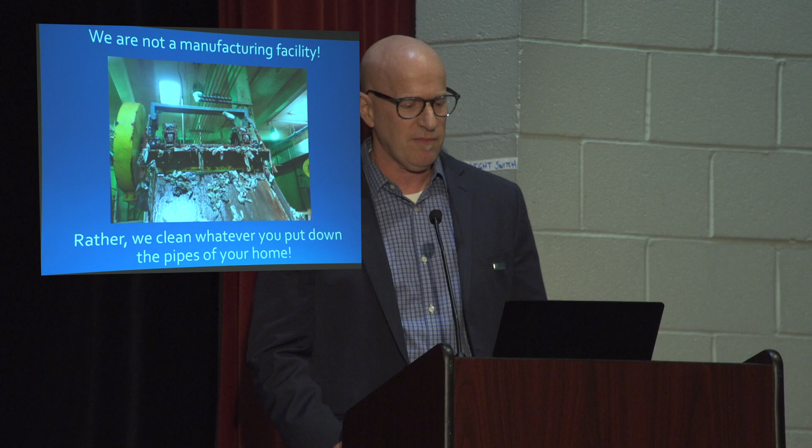Needless to say, it's challenging work. Our operations group is led by a team of dedicated licensed operators, making sure our effluent meets permitted standards. Customer service diligently processes customer billing, fielding questions and reviewing bills with our customers. The industrial pre-treatment team is responsible for verifying that industrial users adhere to discharge standards and overseeing the proper maintenance of grease traps in restaurants.

Our collection system staff maintains the 500 miles of collection system, cleaning, videoing, and responding to emergencies. Our engineering department manages consultants and contractors involved in our capital projects, manages and maintains our GIS system, and reviews all proposed developments in the 4 communities, ensuring they comply with our standards. We have 8 on-call contractors ready at a moment's notice to be dispatched on any emergency that occurs.

So let's step back. What is a combined sewer? If the group was larger, I'd ask how many of you know what a combined sewer is. Well, I'm going to explain that to you, so we can move on.

Under normal dry flow, here's a typical sewer: you get the discharge from your home coming from your washing machine, from the showers you take, any use of water in your home going into your sewer system, and it's coming into our system, following the path ultimately back to the treatment plant.

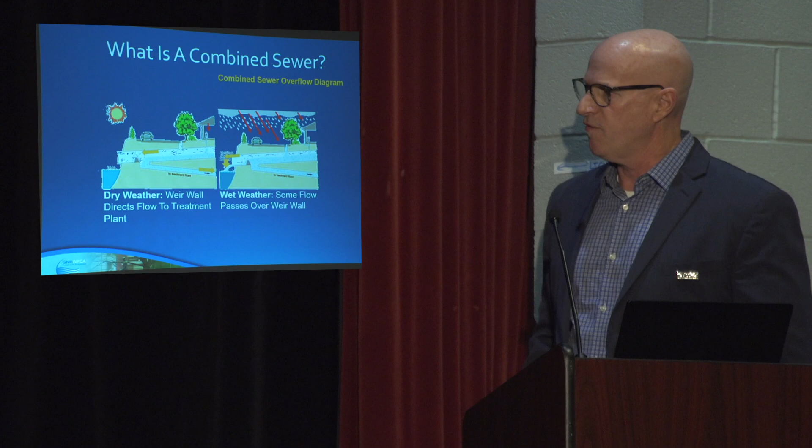Then it rains. And when it rains in a combined sewer system, the pipes — not only from your home, but from roof leaders, buildings, parking lots, and roads — come into the system and ultimately fill the pipe up. When it fills the pipe up, we have relief areas in the pipe called combined sewer overflows, located at what's basically our weir, which I'll show you pictures of later. The flow, when it reaches the top of that weir, overflows and goes into the water course.

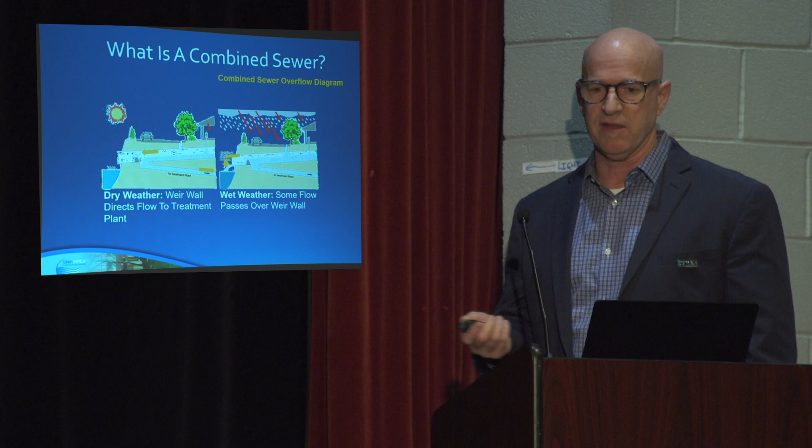This is important because if you didn't have these relief points, if you closed this sewer off, the pipe would fill completely and ultimately back up to your home and onto the road. So there was a real purpose for having these overflows — it basically kept the sewage in the pipes most of the time, and when it rained, it provided relief.

So why do we have these? It's an evolution process — we inherited a system that's been here for a long, long time. There's a map of New Haven from 1872; you can see it's sparsely developed. I think the toilet was invented just about 15 years before that — I Googled that, so if it's not right, blame Google. But at that time, toilets really didn't become widely used until around 1900.

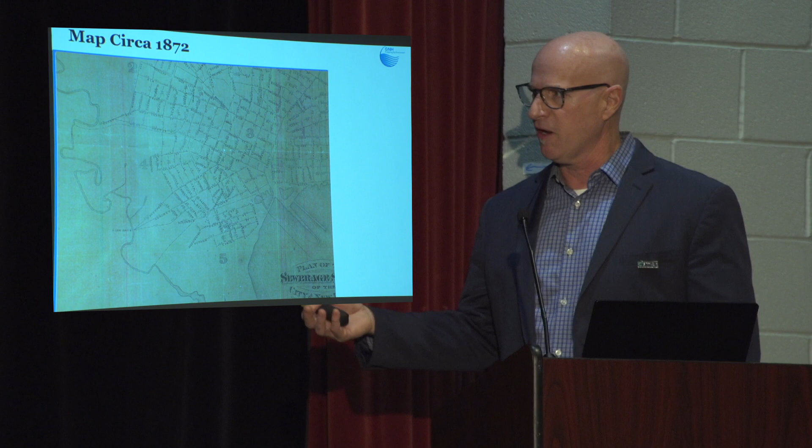So most of the pipes on this map were probably collecting waste from the roads and maybe from some homes with water use, but with horses around you'd have a large mess — so rain fell on the ground and roads, went into the catch basin, and out into the pipes we have here. Back then there were really 4 or 5 major pipes, fairly large, that took flow out to the West River and the harbor.

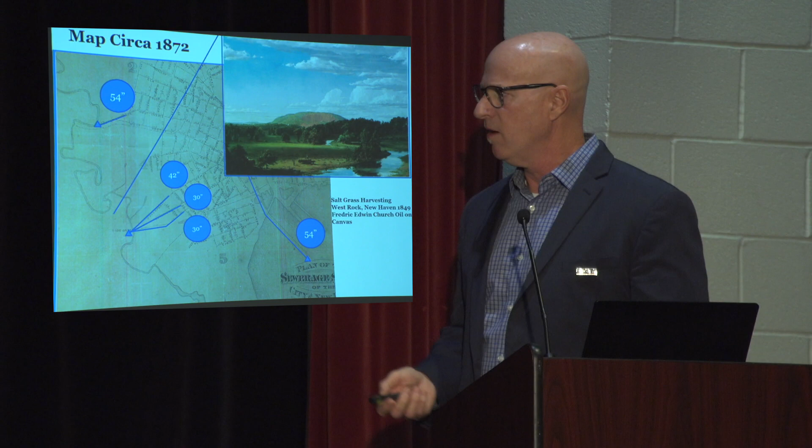This is an interesting photo — note that there's salt grass being harvested in the West River here. This painting is from 1849, done by Frederic Edwin Church — he's famous in Connecticut, I guess — oil on canvas. You can actually see this original painting at the Museum of American Art in New Britain; I've actually seen it, gone with my mom a couple of times. It's a beautiful painting, so I encourage you to go check it out. Note that the salt grass is being harvested there.

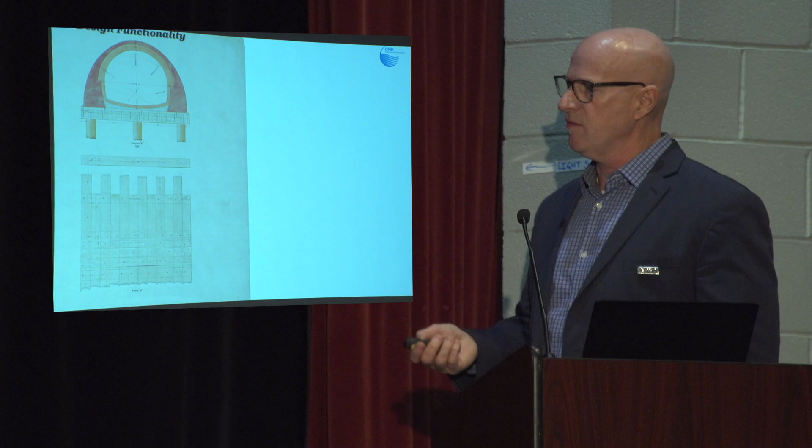This is actually an engineered drawing used for construction of one of our sewers in New Haven. As you can see, it was very similar to the one constructed in that previous photo. And here's one of those weirs that I was talking about.

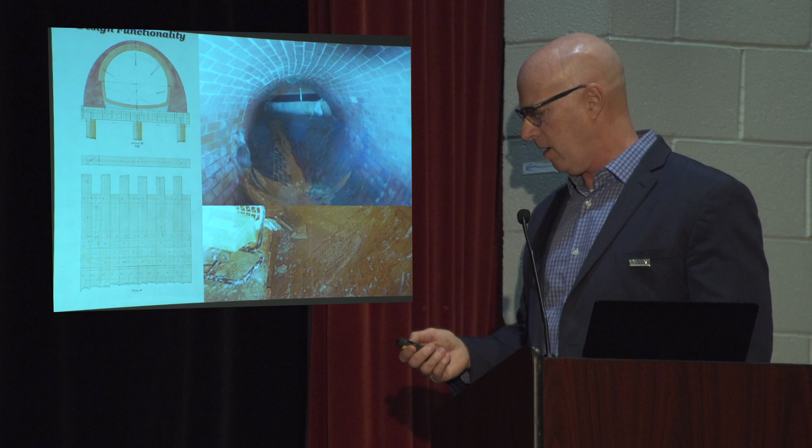This is an overflow weir, where the CSO—the combined sewer overflow—occurs. Just on the other side of that is the sewage flowing by on a normal day, getting transported to the pump station or treatment plant. During heavy rains, water is allowed to come over that weir and flow toward you in this photo, out to the outfall, which is behind you.

In this particular case, we were actually making a repair to that. It's tough to see in this photo, but this is where the sewage is—flowing left to right, going down the pipe in the Boulevard Interceptor. I mentioned that the Boulevard Interceptor was constructed above grade. It has since been covered, obviously, by Ella Grasso Boulevard, so to this day that combined sewer still exists under the road there.

So here's that same map. In this particular case, I positioned some of the new infrastructure that was being built over time. Between 1937 and 1939, the first treatment plant was built, down there on Boulevard where the Sound School is. About the same time, the East Street pump station was built.

Actually, I call it a pump station because it is now—the East Street plant was built at that time. You can see where that star is located. The Union Street pump station didn't get constructed until 1983, which is somewhat amazing, because there was still a small portion of the city of New Haven's combined sewer that was allowed to go directly out untreated. The treatment plant on East Shore was built in 1946, upgraded in '75, and expanded in '85.

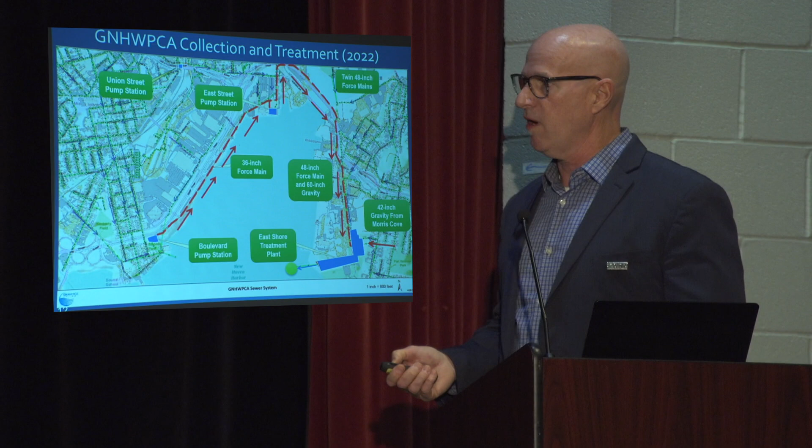Union Pump Station is also shown here. That just gets you over the railroad, and ultimately that flow is double pumped, ending up going into East Street Pump Station.

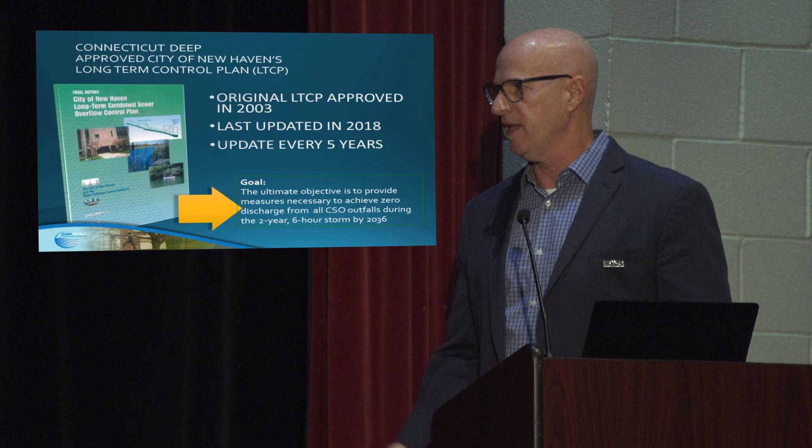Let's go back. The original long-term control plan was approved in 2003, last updated in 2018, and updated every 5 years. The ultimate goal is to remove CSOs in the 2-year, 6-hour design storm—an agreed-upon design storm negotiated early on in the original plan—with a goal of 0 CSOs during that design storm by 2036.

Where are these CSOs right now? There are 11 CSO outfalls: 3 in the harbor, 4 in West River, 2 in Mill River, and 2 in Quinnipiac River.

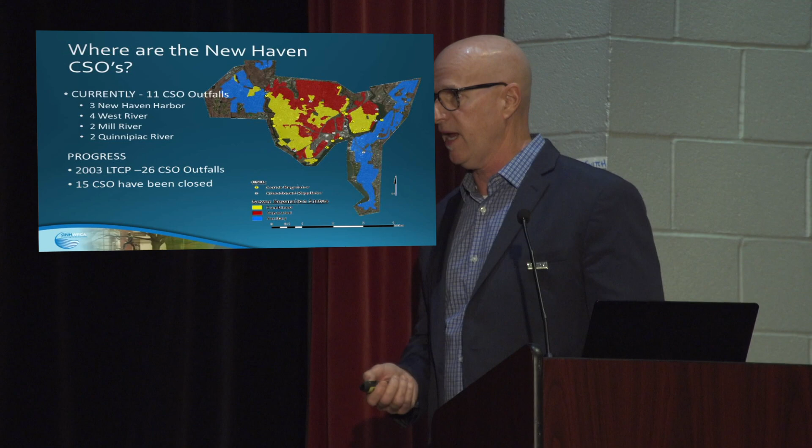What kind of progress has been made? Here's a simple way to measure it. Back in 2003, in that long-term control plan, there were 26 CSO outfalls. We've worked over time and reduced those by 15, bringing it down to 11. Great progress has been made on that.

What's the strategy? It really hasn't changed much since the 2011 update: maximize conveyance and storage in the collection system, maximize flow to the treatment plant, reduce CSOs by modifying existing regulators and structures, and increase capacity at the treatment plant. There are two tools in our tool belt that probably weren't in the original plan, or weren't stated as strongly—one is green infrastructure, and the other is resiliency.

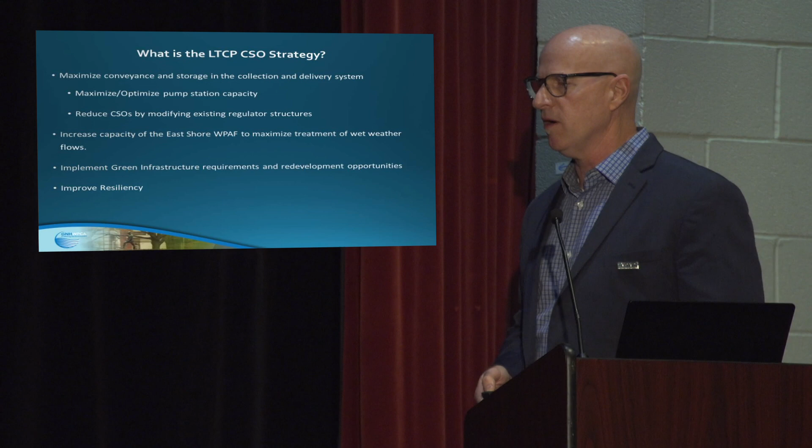Everyone remembers Storm Sandy. They probably know exactly what they were doing when they saw reports of New York City underwater, and if you're along the coast here, you were very aware of it. That changed the game in the Northeast on how we have to design for these storms. A lot of federal money became available because of these storms, and we took advantage of that.

In this graphic, we have our Fort Hale pump station in New Haven, one of 4 stations, along with East Haven, that we elevated. These stations are in flood areas, and in this case all the equipment was in the lower level—if you got a storm surge, that station would go down and become unusable. Now the generator is located well above any flooding, and all the equipment below is pumping equipment designed to be in the water, so this station will continue to operate during a flooding situation.

This one, along with the 4 in East Haven, were each $1 million projects, funded through a 75% grant we got through the FEMA program to make them more resilient.

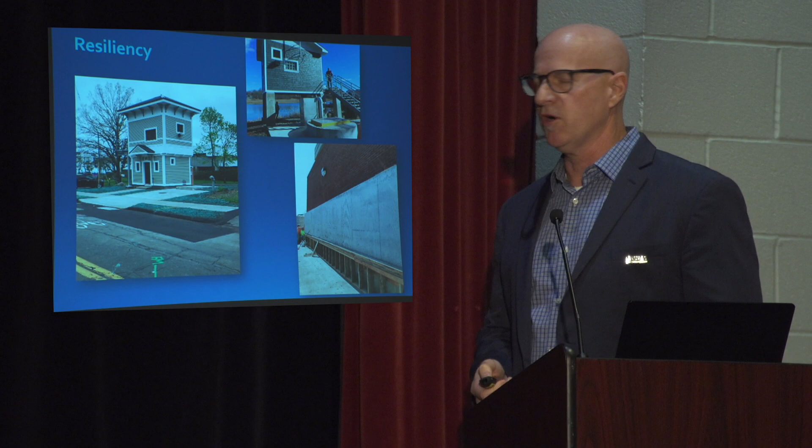This doesn't look very fancy, but this is our large Boulevard pump station, the one handling 30 million gallons a day, and this is its flood proofing. When we get significant storm surge, this station has barriers that get installed in the doorways, and the outside of the structure was reinforced to withstand flooding, so this station will stay functioning during any flooding events. That's some of what we're doing with resiliency.

Green infrastructure: we like to be a good neighbor and a good example. This is our own parking lot at 260 East Street, a sample project. Even though we're not in a combined sewer area there, we do discharge to the storm sewer, so we developed a green infrastructure parking lot.

The flow goes into bioswales, and the plants there, just planted, have grown significantly. They uptake most of the water in normal rainstorms, and during heavier rainstorms it's allowed to overflow into the storm sewer located in the street.

We're very proud of this one—it's the first bioswale ever constructed in the city of New Haven, done through the teamwork of the city of New Haven, the Greater New Haven WPCA, and the DEP. This is also, to my knowledge, the first bioswale incorporated and made eligible in the Clean Water Fund.

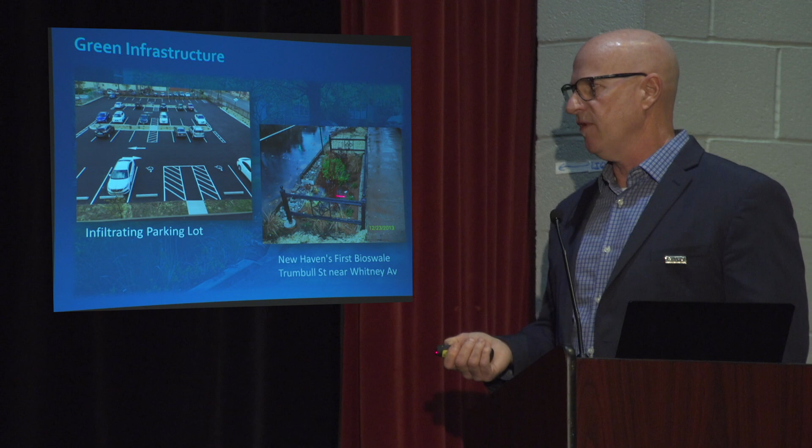We built over 90 of them in the West River watershed basin. They take up flow in common rainstorms, and for the heavier ones, they do a really nice job taking that first flush of rain out of the system. So it benefits not only the storm systems in New Haven where they're installed in a storm system area, but they also benefit us in the combined sewer area.

So just kind of quickly reviewing the 2018 update, the long-term control plan update, that was the last one. That one we focused more on the collection system. We focused on short-term improvements to reduce CSOs. These were raising weirs, anything that we could do that kept flow in the existing system.

And we were able to do that because by that time, we had many years of CSO monitoring. And with that knowledge, we were able to close many CSOs, and we were able to raise a lot of those weirs at the CSO outfalls.

We also embarked on an aggressive cleaning campaign where we cleaned over 20 miles of large diameter sewers. We took out 3,000 cubic yards of debris. That debris, now that it's removed, that's additional capacity that those pipes have to handle flow.

We made some improvements to our pump stations to increase flow, maximize flow to the treatment plant. And one of the unique things we did in New Haven back in 2008, it's worked out very well, is we required developers to do exactly what we're required to do.

DEP and the consent order requires us to handle that 2-year, 6-hour design storm. So when a developer comes in and they want to connect back into the combined sewer with their storm drainage, they can do so, but they have to retain that 2-year, 6-hour storm on site.

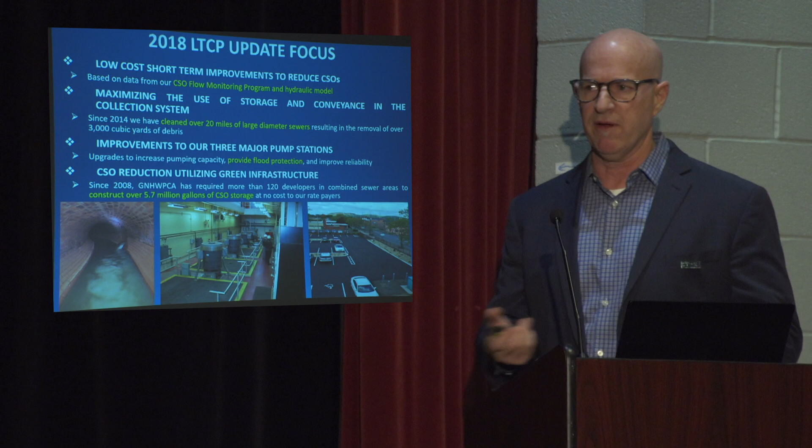They could be bioswales, but most of the time they're almost like septic systems, below grade systems that capture the water, allow it to fill up. New Haven's a great community for infiltrating water. It's very coarse sands, so it really is a perfect marriage in New Haven to be able to put in these infiltrators.

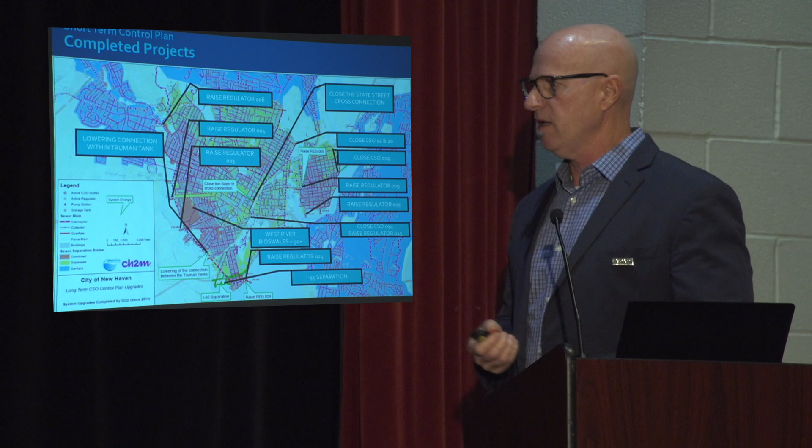So, like I said, these short-term projects that we started in 2018, we identified all of them. I'm not going to list them all, but you can see we closed many CSOs, we raised a lot of regulators. Every time we do this work, we go in and do this stuff. We take photos, we document, we send it up to DEP, and we make everyone aware that we're making progress on our program.

So as we made improvements, we had to run the model again to see what the results were. But we couldn't just plug in any rainstorm, or any given year, because every year is different. So we have our consultants and DEP and the authority all agree on what a typical year would be. They look at all the years - I think we went back into the 40s and 50s, all the way up until present - and determined which year had the most typical rainfall. As it turns out, it's the 1967 year.

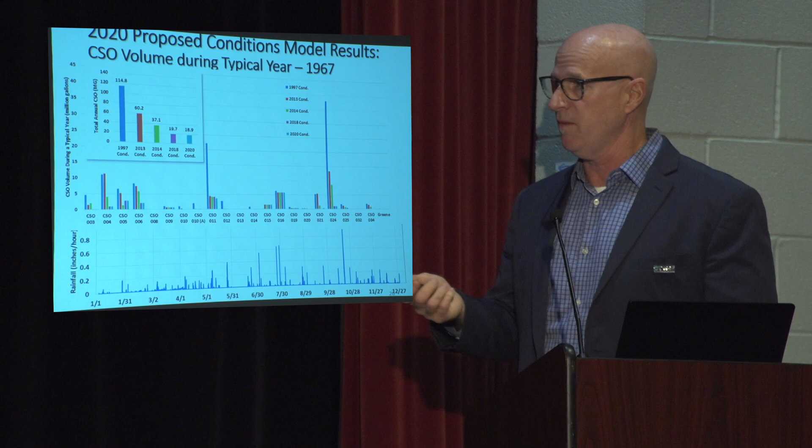We know this is true because we actually look at the flow. We have flow monitoring information that we look at all the time, and our typical rainstorms, as long as we remove the outliers - the years we have very little rain and the ones with a significant amount of rain - we're coming in around 18 to 20 million gallons a year. So we know this model is fairly accurate.

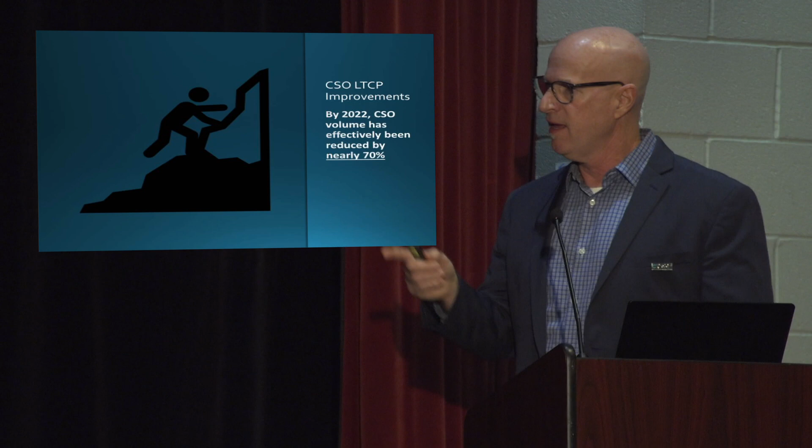Like I said before, right now we've reduced CSOs by nearly 70%. That's pretty significant. There's a mountain climber here, Nick Stevens, who's going to speak later. He likes this graphic, but it really is true - if you're climbing a mountain, the higher you get, the more difficult it gets. It's similar to our program. The closer we get to removing CSOs, the more difficult it gets, the more expensive it gets.

So now I'm going to turn it over to Mario Riccozzi, our manager of design, and he's going to go through the near-term projects that we're working on and take it from there. Is there any questions on the program as it existed and how we've gotten to this point before I turn it over to Mario? We can have separate questions. If there's not, I'll hand it over to him.

Thank you very much, Tom. Appreciate it.

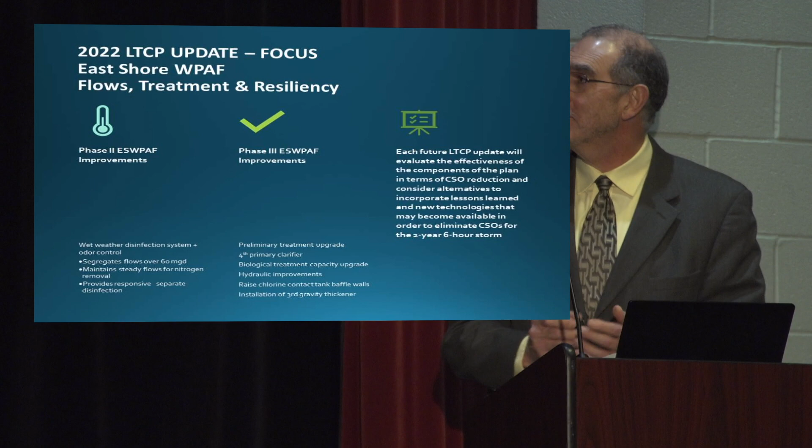So where are we and where are we going and why are we doing this? The 2022 update - the major strategy is to bring and maximize flow to the treatment plant. That is from back in 2011, and we did the phase 1 work at the treatment plant where we really installed the backbone necessary to make these improvements in the future.

We upgraded the electrical system, we upgraded the odor control system, and we increased the number of vessels to manage the solids, because the more flow you bring in, the more solids you end up with. So we put those all in place, we monitor that, and then we say, what is the next step? What are the other projects that we're going to be doing?

As part of a long-term control plan update, you really want to look at the sequencing. Just like your own home, you don't want to do all these projects all at once, because you won't be able to live there while you're doing all the projects, or it'll be very uncomfortable. So we try to sequence them to build and operate systems that have the flow coming to them that'll make them useful. We don't want to build a building and put in pumps that aren't going to operate for 10 years or 5 years. Makes no sense - they'll be old and obsolete before we can get to use them.

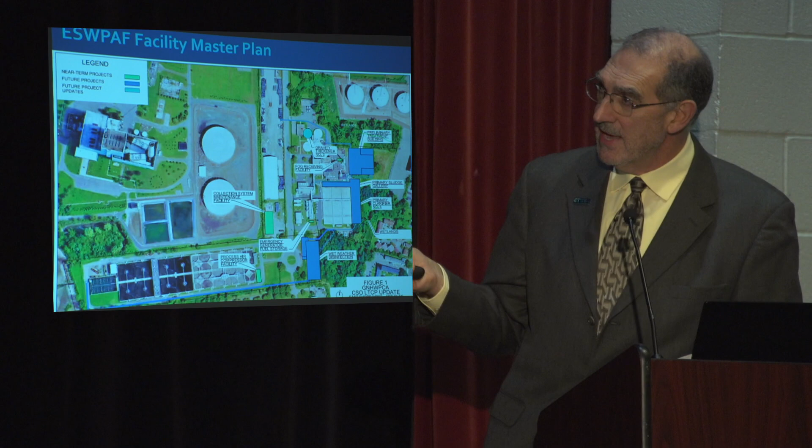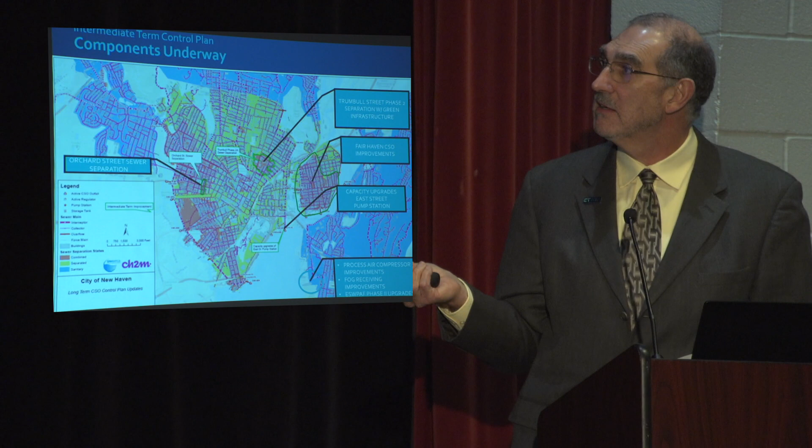Projects that we have underway right now: there's a Trumbull Street Phase 2 sewer separation project in the downtown, which I'll cover. Orchard Street sewer separation project, also near the St. Raphael campus of Yale New Haven Hospital. There is a project coming up for the Fair Haven CSO improvements, the next phase of that. Our East Street pump station, which I'll cover, and I already discussed the process air compressor, but I'll give you a little more information on that.

But you can see we're working all around the city in a number of locations. Sewer separation was really proposed by the city back in the 1980s. They did quite a bit of it. They had a plan put together as to where we should size, what pipes should go in what locations, what sizes, so that we can get the stormwater out to the harbor and avoid it mixing within the combined sewers.

These two projects, the Yale campus Trumbull Street project, is immediately north of Trumbull Street. I believe it was around 2012 to 2015, we closed part of Trumbull Street, the exit and entrance into Yale's campus, in order to install a separation project. That was to connect the Farmington Canal Greenway storm drain that had been installed over time into the State Street storm drain that had also been installed as part of redevelopment projects. So that little piece, even though there was work done, still was a combined area. Now we've separated that, which allowed us to close one of the CSOs, combined sewer overflows, so no longer does the water from that area overflow the sewage from that area.

The Yale campus project is a little unique. It's our phase 2. Now that we understand better how bioswales work in the city of New Haven and how the soils react, and working with DEP and the city, we have orange lines. This is Whitney Avenue, this is the Peabody Museum if you're familiar with that, Sachem Street, Pearl Street. This is a connection again into that State Street main that was installed many years ago in the 1980s when State Street was redeveloped. So we're completing this connection through Bradley Street and Whitney Avenue.

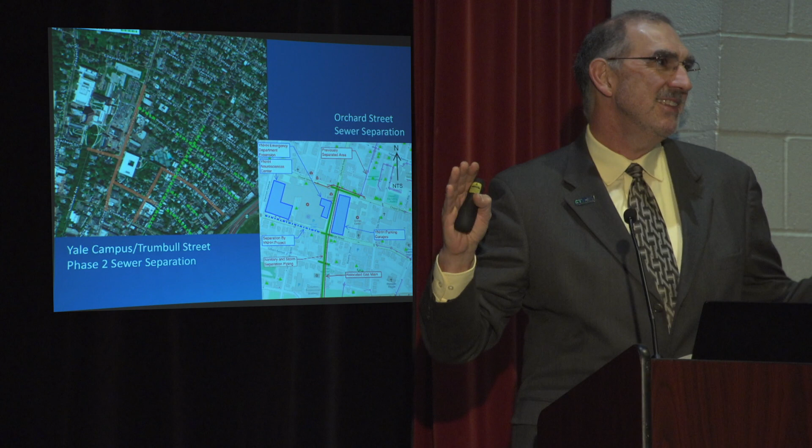The missing links in the middle are the toughest part, and Tom said it is challenging. Well, these missing links are very challenging. The piping is about 48 inches in diameter, so I can't walk through it, but I can crawl through it. We did walk through the ones on Trumbull Street.

We've done this in conjunction with the hospital. They're building a bed project that is extremely large and moving quickly. They are doing part of the separation work themselves as part of their redevelopment, and we're putting the piece in on Orchard Street. That work is just starting and will continue for the next couple of years.

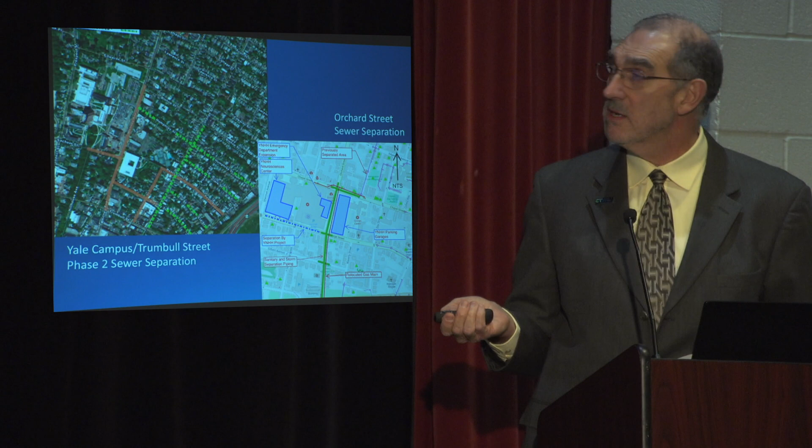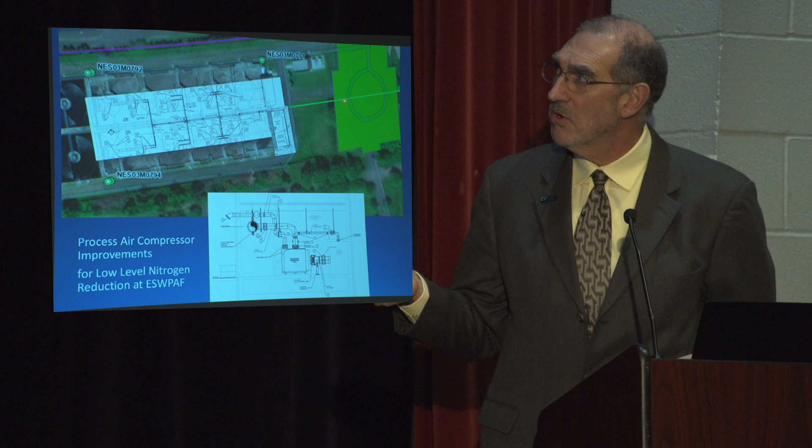Anyone familiar with the area, this is East Shore Parkway in the cul-de-sac. This is in green because we have an easement across that. There was some confusion at the city plan meeting. Originally the city owned all of this property, but in 2005 they transferred the properties that were the treatment plant, the pump stations, the pipes, over to the new Greater New Haven Water Pollution Control Authority. When we went to do the phase one work at the treatment plant, we realized we own the street and the city owned part of the treatment plant site. So we were able to do a land swap. There was some concern about access for a walkway or trail that's been in the works for many years to get into East Shore Park. That access is all within the control of the city, in case there was a question.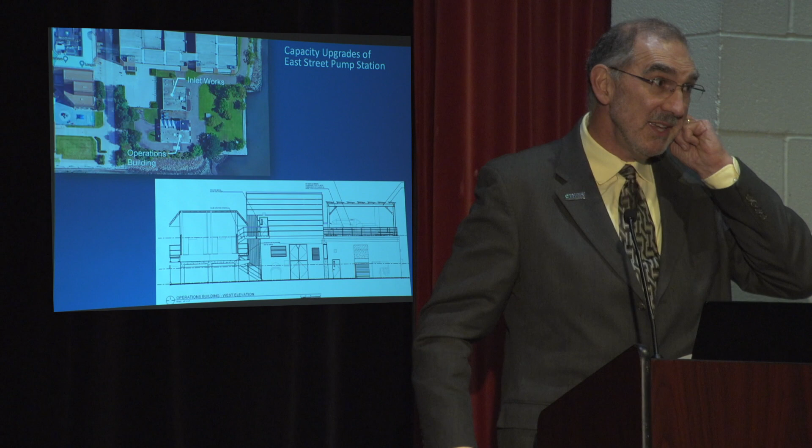We try to make it look as good as we can when we do that. But this is an emergency generator - actually 2 generators within an enclosure. So we baffle the noise. We keep it elevated above this magic line, the design line. We're doing this so we can maintain the pumping station's operations during a major storm, and we have it up high so we can always recover quickly.

We also have electrical systems on the first floor, so we're expanding the electrical room on the second floor - it's actually a control room. We're making all our electrical equipment, items that should not be submerged in water, up in elevation, so they'll be significantly above the flood level.

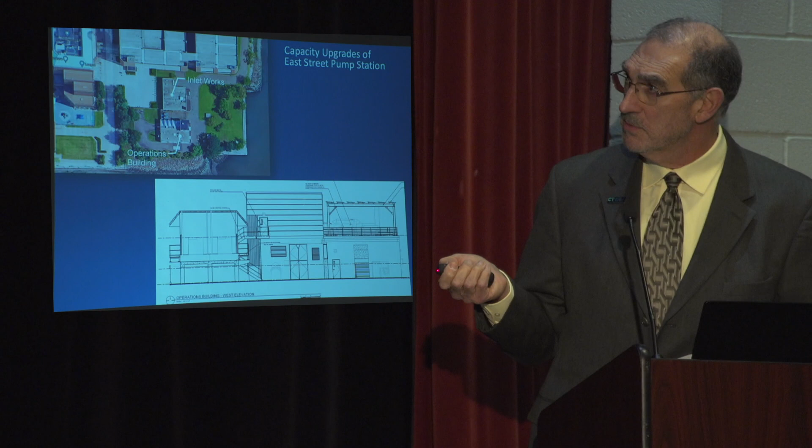And then we're keeping this low, and we're adding solar panels above this roof area. It does a couple of things. One, it gives us a little bit of alternative energy, more of a demonstration project, because we couldn't have a solar field large enough to manage the amount of power the pumps use. But it will help maintain all of our controls while we're in transition to the generators when we need to. That's essentially what we're going to be looking at. So we're doing it in phases. There's potential in the future of another building in the middle here, but that's something we're going to be evaluating in the future.

And with that, I'm going to turn it over to Nick Stevens to talk about his favorite project. Ooh, hold on one second. We're recording this so we would like it on.

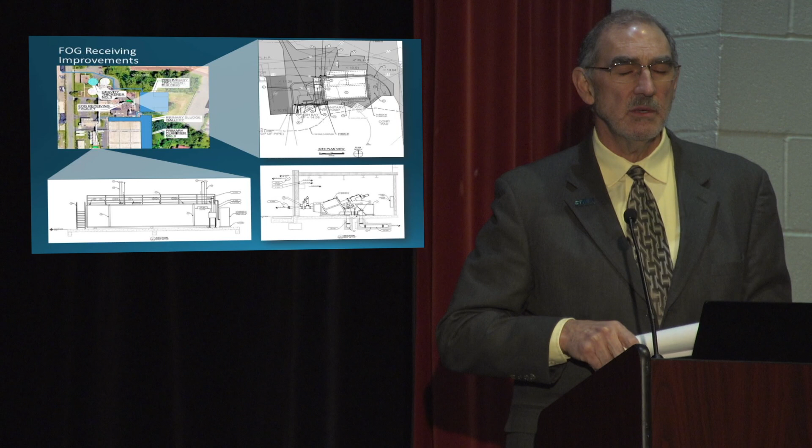You mentioned odor control improvements. When was the last time you had odor control improvements, and after you do them, how long do you think it'll last? We did a major upgrade around 2015, 16, 17 in the phase 1 improvements. We're doing an odor evaluation currently because we've gotten a couple of complaints. The next major odor improvement is scheduled for start of design a couple years from now, and we're looking at methods we can do in the intermediate timeframe. We've gone through a rebalancing of the system. The odor control system has a central building where all the equipment is kept, but the piping goes throughout the entire complex - you've probably seen it, it's up in the air and it's gray. That has different legs that go down to different tanks. So we've done a rebalancing because we might have been drawing a lot of air from one tank that didn't have as much odor as another tank that really needed more air.

Okay, that's we've gone through that. Hopefully the next odor control improvement will be much better than the 2015 one. I've been living in the Cove since 2009. The odor has not improved, even with your 2015 odor control improvement.

My second question is, you mentioned... If I can just say, when you do have an issue, please call our emergency number, 203-466-5260 - I think that's the right number. Yes, it's correct. This way they can log it and try to figure out what's going on right then and there. Don't wait till Monday. That's a 24-hour number, thank you.

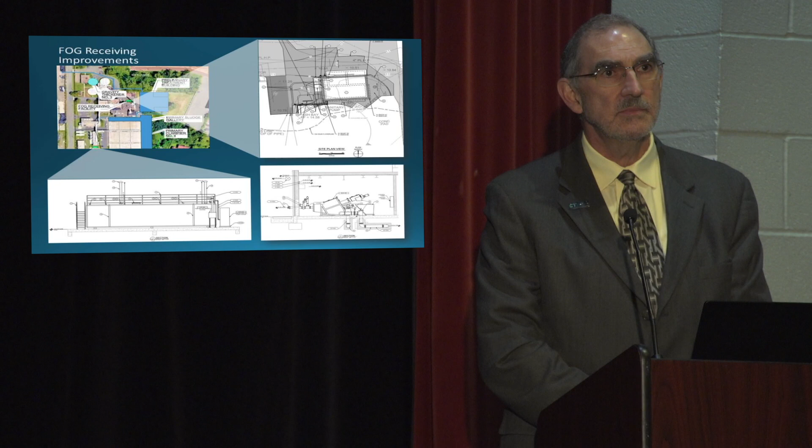My second question is that you mentioned projects all over the city. You did not mention the East Shore pumping station, I mean on the corner of Lighthouse Road and Townsend Ave. The Morris Cove Pump Station? Yes, it looks like a home right next to Dean Street. Is that going to be raised? And also, what about the pumps that pump out Morris Creek? Are those going to be moved and a permanent solution put in?

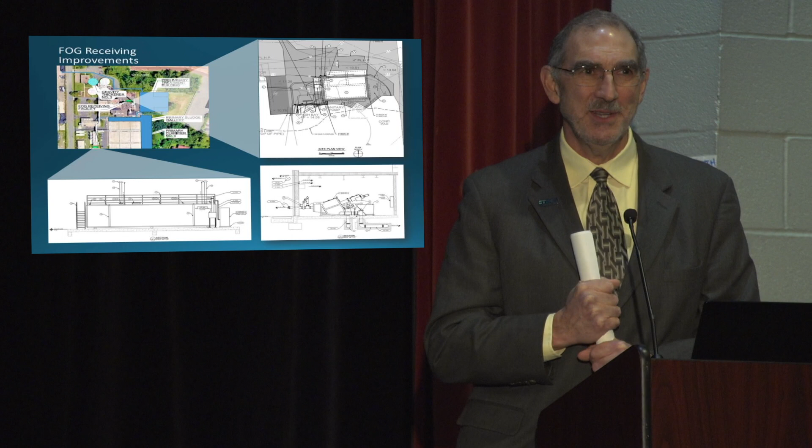So the pump station itself - we do have a project currently that FEMA is looking at that will assist us in reinforcing that for flooding. It's actually up pretty high, but we want to add another couple of feet of protection around it. There's no intent to raise that. That's a very large pump station - doesn't look like it, but it's very large on the inside. The pumps for the creek itself, the city manages that, and I don't have an answer for you on what's being done with that. I apologize.

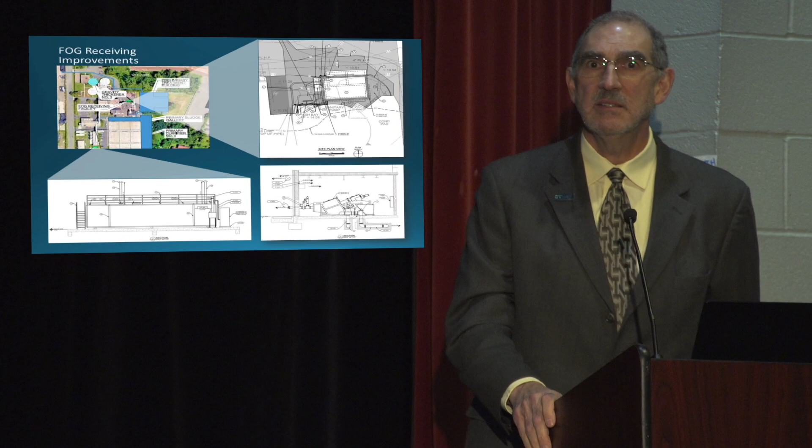Any other questions? Okay, Nick? Thanks, Mario. All right, so now we're going to talk about another project at the treatment plant.

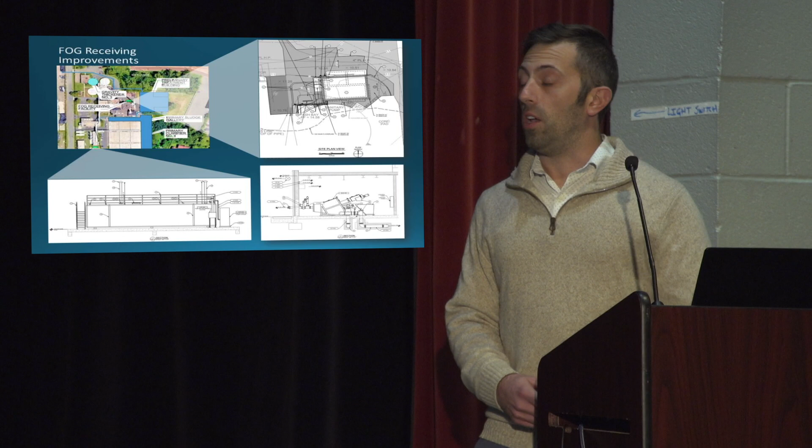This is the FOG Receiving Improvements Project. It's a small project, but important. FOG is fats, oils, and greases - material taken in from restaurants that we don't want flowing through the collection system because it causes a lot of maintenance problems. So it's delivered directly to the plant. Our current connection doesn't provide for very good screening, and it's located basically in the same location we'll be placing this new facility. The existing connection is a fixed screen - a lot of debris passes through it, causing issues. So we're installing an advanced screening system in this new facility. This is the new facility in plan - about 27 by 36, so not too large. It's going to house a screening unit, and there'll be some buried storage, FOG storage tanks, that allow for additional processing time before it's transferred downstream.

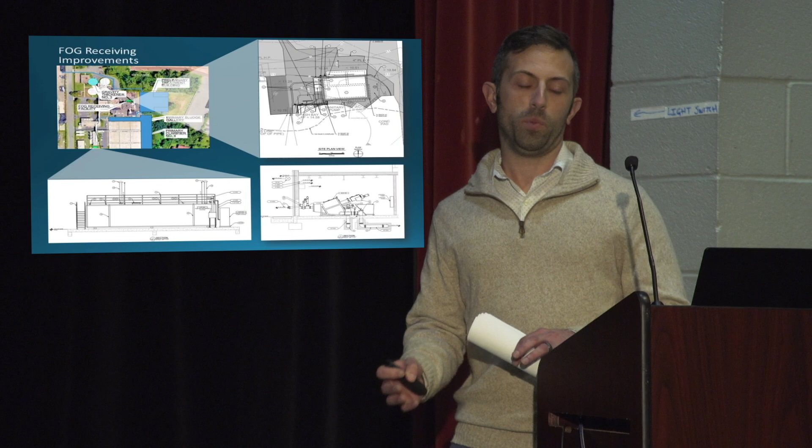It is also located in a location that currently houses a buried fuel storage tank, which provides fuel to our emergency diesel generators at the south end of the site. You can see this is a pretty long distance. Also, buried fuel storage tanks aren't that popular anymore.

So what we're doing is relocating them to the southern part of the site, closer to the generators. This area is luckily outside of the floodplain, but we're going to put them on a raised platform anyway, 2 feet above the 500-year storm elevation. So, all but the most catastrophic events, this tank will not see any level of water at its installed elevation - very safe.

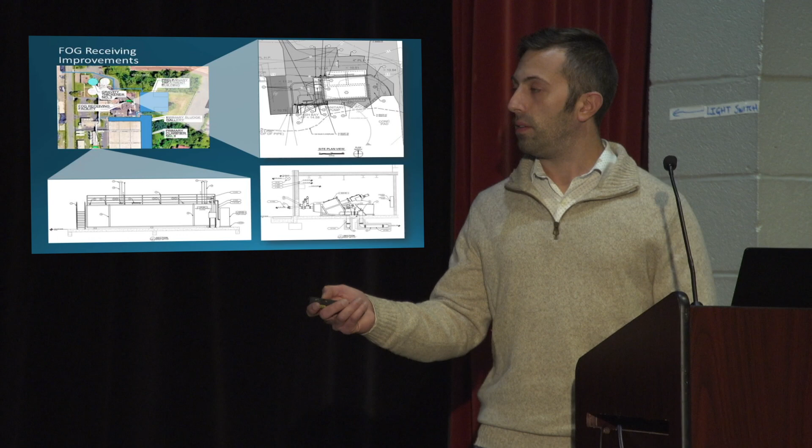So that's the last project at the plant as part of this intermediate upgrades for the long-term control plan. Upcoming intermediate term projects:

We have the Fair Haven CSO Improvements Initiative. So we're basically going to do an updated model of the Fairhaven area. We're going to take real attributes from the sanitary sewers in the Fairhaven area, put them into our model, do an update of that model, and recalibrate it with real-world data taken from flow metering efforts.

To make sure that the model is accurate to today's terms, we're then going to run through a number of scenarios to determine weir height adjustments we can make within the CSO regulators to prevent CSO events from occurring and also protecting the public. To also bolster the system in this area and prevent CSO events from occurring at the current frequency, we're going to implement green infrastructure based on what the modeling results come back with.

And then we have the wet weather flow conveyance from the west side of the harbor. As Tom mentioned, we have two of our largest pump stations on the west side of the harbor - Boulevard and East Street pump station. Both of these pump stations pump into a single pipeline that crosses the harbor down to the East Shore facility to be treated. These pump stations are going to be upgraded.

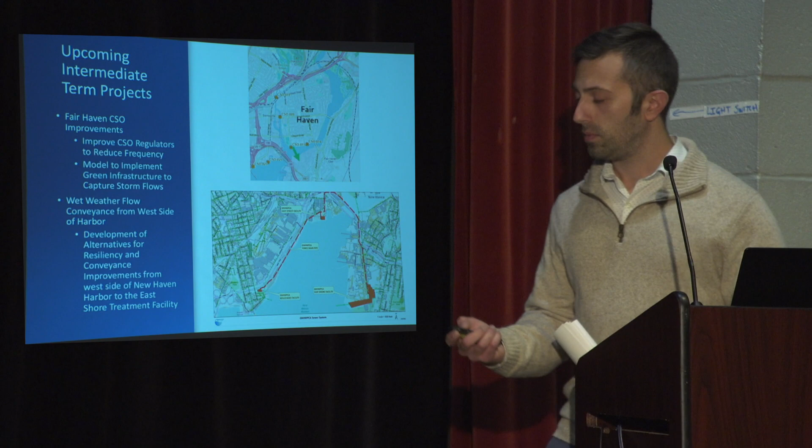All right, so here's a map of the long-term control plan components. A lot of this has been talked about before, but this is more of a display graphic to give you an idea of where these improvements are going to be happening.

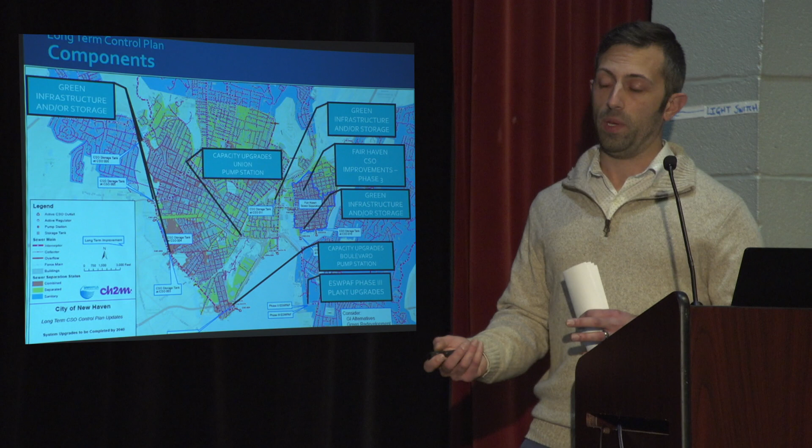We mentioned the Fairhaven CSO improvements. We talked about the plant upgrades - Mario went through those. And then also Boulevard was talked about. And then Union Street Pump Station, later on, will be upgraded to provide additional capacity and flow conveyance. But then you'll see a lot of green infrastructure and storage call-outs here. So we're going to continue our effort to maximize green infrastructure around our CSO regulators, trying to minimize those events, and implement storage where necessary based on our modeling efforts.

So in addition to our long-term control plan projects, I also wanted to go through some of our other projects that we're engaged with or soon to be engaged with, just so everyone's informed about what to expect in the near future. So Woodbridge Pump Station rehabilitation - that is a project that is occurring currently.

Probably another year on that one. We're basically rehabilitating an existing pump station that's aging. We're putting in a new standby generator, providing new pumps - so basically a new pump station in place of the existing.

Collection system maintenance facility - Mario touched on that at the plant, under construction currently. Whitney Museum Green Infrastructure Project - this is a public benefit project. We're doing this in conjunction with the town of Hamden, RWA, and the Eli Whitney Museum to redo a parking lot there, implementing bioswales and other green infrastructure features that Tom talked about in our own parking lot.

At 260 East Street. And then we have the Westville Whalley Sewer Study. The first part of that study has been completed. We are going to be receiving some grant money to further analysis and try to make improvements in that area, to improve wet weather performance in that part of the collection system.

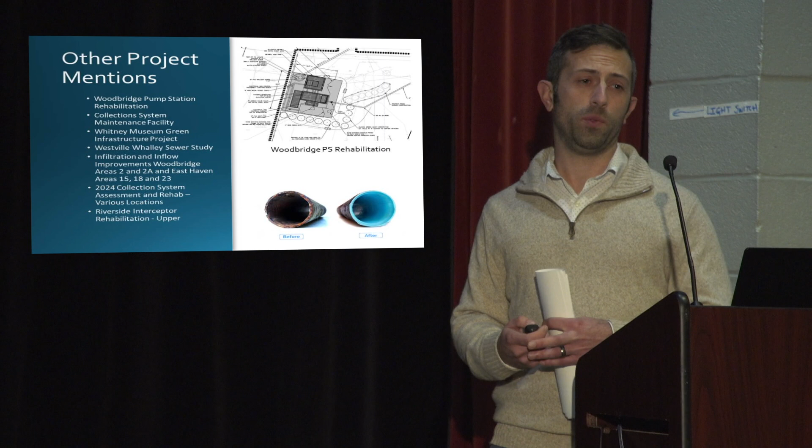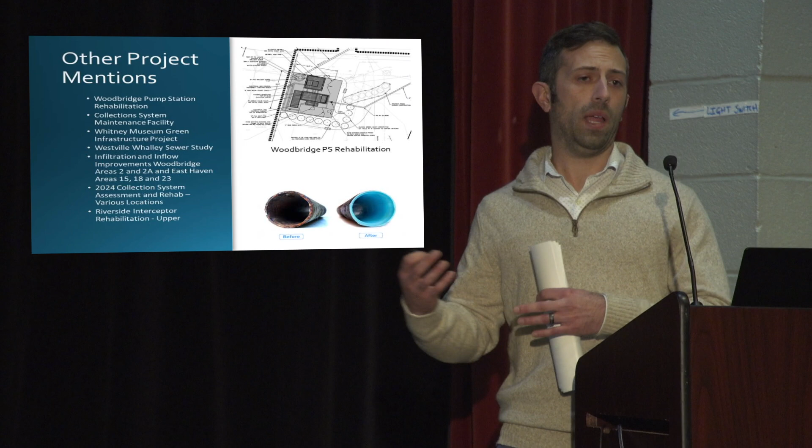The last mention on this slide is the Riverside Interceptor Rehabilitation Upper. Currently, some of you might be aware, we're rehabilitating some sanitary sewer we're having issues with in the Marsh area in East Haven. We're going to continue that effort to make sure we don't see any failures in the future, so we're going to do more investigative work and additional lining efforts to renew that sewer. So with that, I'm going to turn it back to Mario.

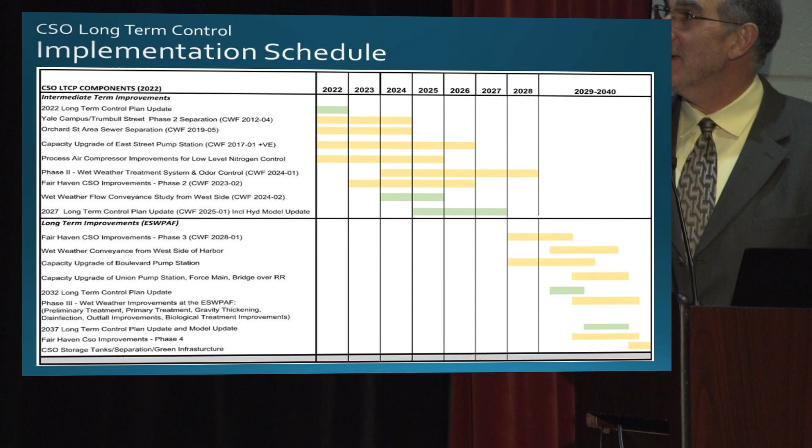So when is all this going to happen? We covered a number of projects. The intermediate term group, such as the East Street Pump Station, Yale Trumbull separation, Orchard separation, the process air compressors, and beginning our phase 2 work, is in the next few years. We should be starting phase 2 at the treatment plant in a year. That's the design work, so don't expect construction yet, but that'll include the odor control.

We also will be doing the harbor conveyance study from the west side to the east side. That'll be starting hopefully in '24 as well. And believe it or not, our long-term control plan update will be starting with hydraulic modeling in 2025, which is not that far away.

So we're happy to be wrapping this phase up and getting ready for the next one. The longer term projects - Nick had mentioned the Fairhaven CSO phase 3. We already have some phase 2 work, which would be a couple of the regulators to install new ones. That will be starting out in the 28 time frame, followed by some wet weather conveyance construction from the west side of the harbor, whatever that looks like, as well as the Boulevard Pump Station improvements.

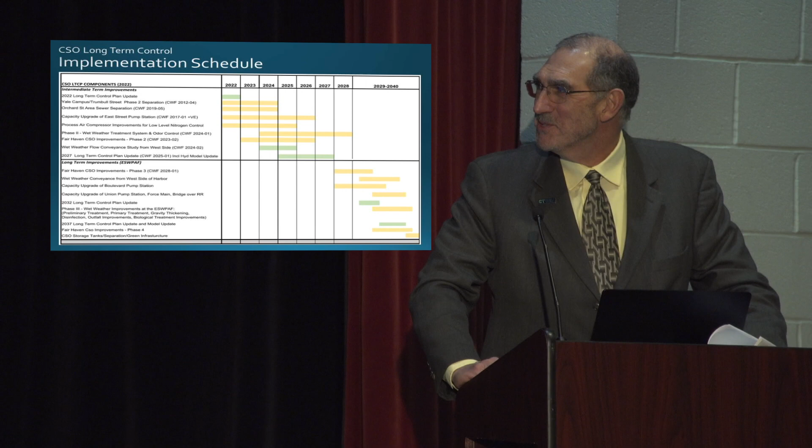So we're still on track to minimize the CSOs at the 2-year, 6-hour level of service. How does that compare with other communities? Across New England, many communities are on a 1-year storm instead of a 2-year storm, so we're at a higher bar that we're trying to reach, and we think that is achievable, albeit not so easy.

We still want to maximize the system storage, use the pipe capacity that we can for that short period of time when the rain comes in, and maximize the flow to the plant. We think we've got a nice plan to take that extra flow and bring it around after primary treatment so that we can make improvements to the Mill River, the West River, and the Quinnipiac River. And then maximizing the capacity at the plant up to the 187 million gallon a day target.

Any other questions? Yes. One second. Yes, I will. The question was, can I repeat the email address? It's engineering@gnhwpca.com.